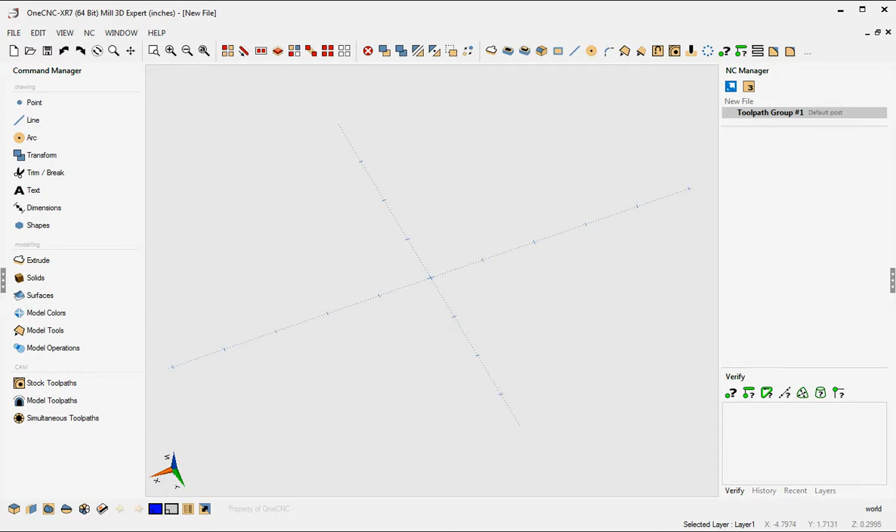This is something that again has been available all the way through since XR5, but because XR7 now allows you to collapse these toolbars, you can now work full screen if you'd like. All right, so that's the first thing I want to demonstrate in this video. And again, this full screen option is going to be available in all OneCNC systems.

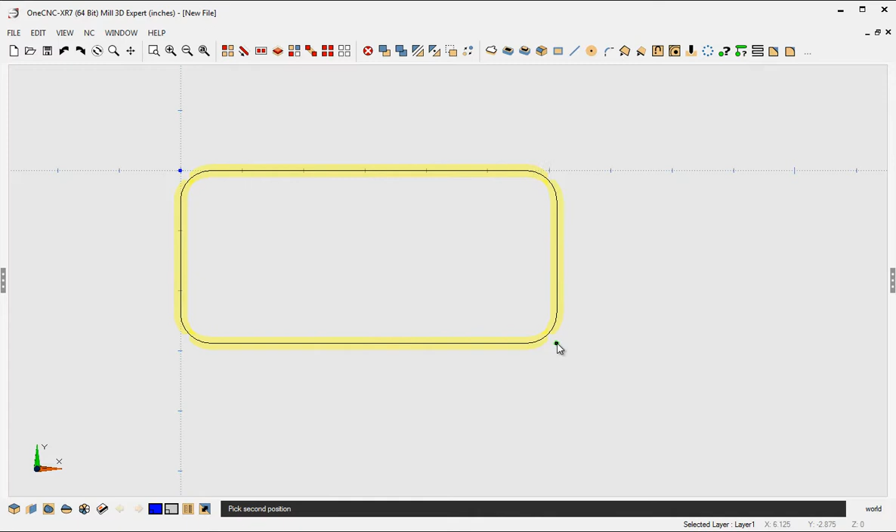So what's it like to work full screen using the quick access toolbar? Now I'm going to sketch a rectangle here. I'm just going to grid point snap to kind of speed things up here. Let's select the line command. Ultimately, I'm going to be making a solid model out of this. I'll say that looks fine.

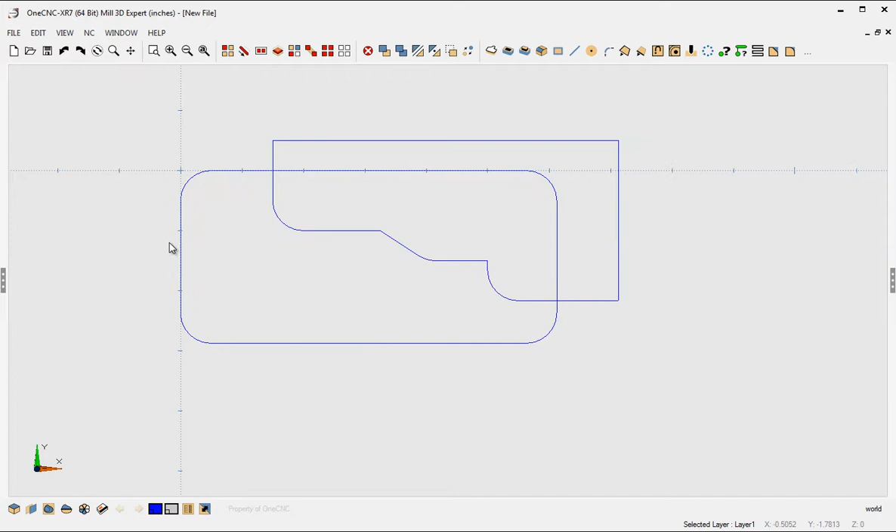Let's come up to here. That looks good. Let's add some fillets. Now, I'm moving through this really quick, and you can see I'm not putting any parameters in. If I wanted to, I could open this up here, and then when I go into something like fillet, I could access these parameters over here. Okay, so there's lots of versatility built in here. I'm just kind of giving you an idea of what can be done.

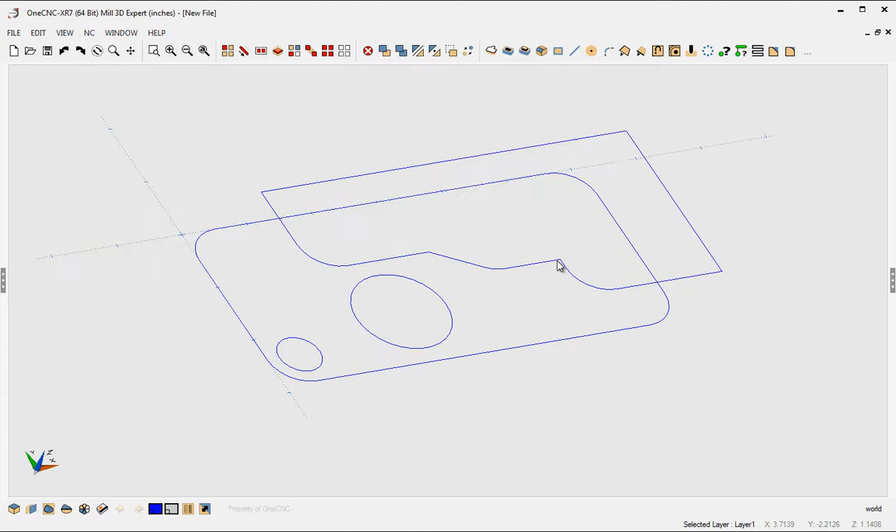Let's create a circle here. Let's quickly go to a top view. How about another circle here, but let's change the diameter and maybe change the location of that. Maybe put it right about there. Okay, so again, all I'm doing here is I'm just demonstrating working full screen. Now you might think of full screen mode as not being that big a deal, but once you see what it's like to use the entire screen for CAD and CAM, I think you'll immediately see the advantages to it. It's certainly something that I think is very nice.

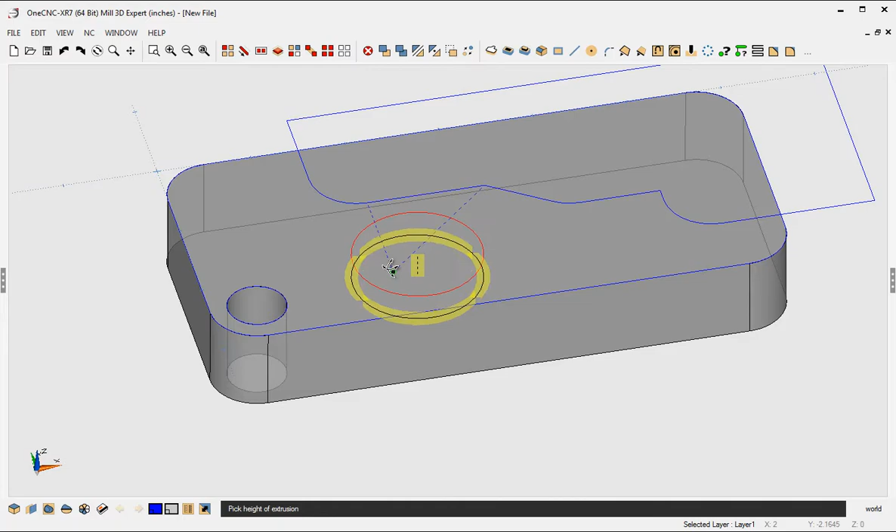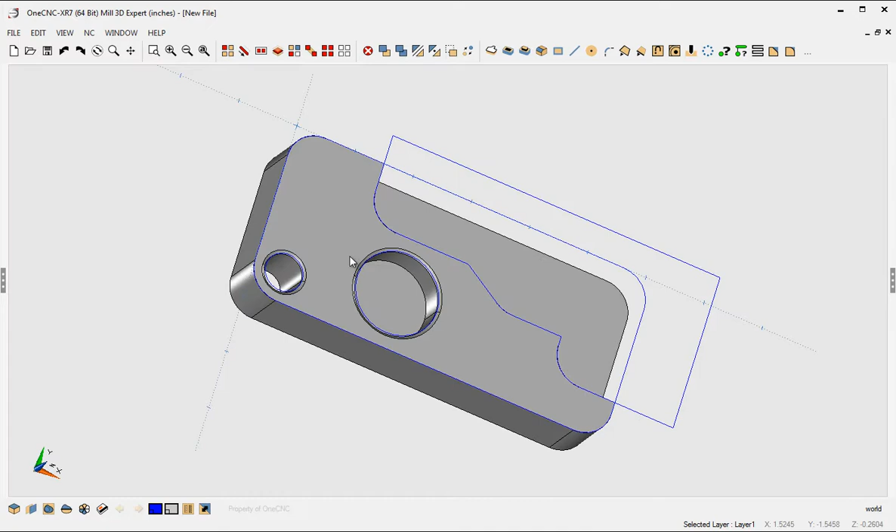So let's go into cut, and I'm going to just cut right about there. And the reason why I'm doing this is I want to demonstrate another new XR7 feature within this video. Let's just drag it right about there. And let's finish this by creating a couple of chamfers. 50 thousandths is fine. So I'll put a chamfer on each one of those. All right, so the actual procedures that I'm doing here, the actual commands, these are things that have been available since XR5, but the ability to work full screen and work right off your quick access toolbar solely is something brand new to OneCNC XR7.

Okay, so now that we have this, let's take a look at another feature. This is something else that's going to be available with all 1CNC systems. Express, Advantage, Professional, Expert, makes no matter what level of OneCNC you have or what discipline, whether it be lathe, mill, wire, profiler, or whatever, you'll still have this new feature as well, and it's called model colors. So what is model colors all about? Well, what this allows you to do is it allows you to color different faces on a solid model or different surfaces if you want to. And as I do this, I'm going to explain why this can be very beneficial.

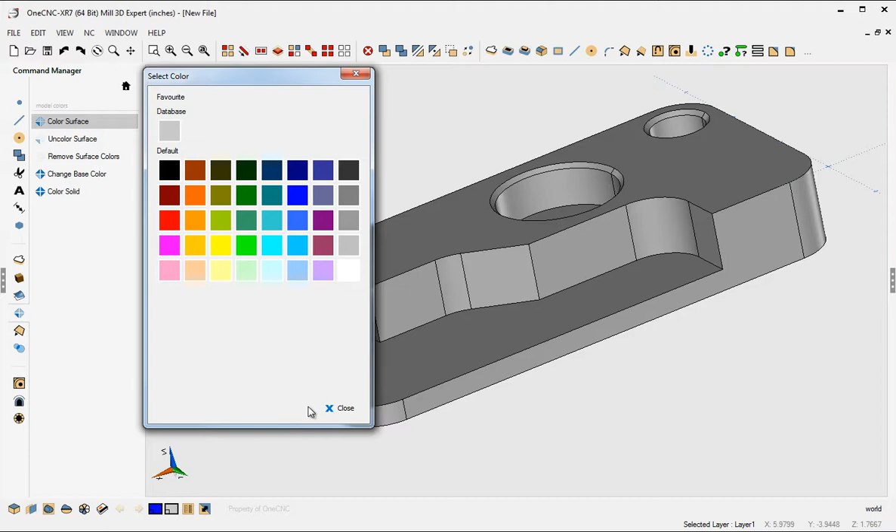Let's go to color surface, and when I click that, we get a color palette here. I'm going to start with this purple, and all you do is left-hand mouse click on the face that you want. Now, because this is a solid model, let's grab the bottom there as well. Because this is a solid model, we're just coloring the faces.

But what's interesting is it still remains one solid model. Now, the advantage to that is in the past, if we wanted to color surfaces, we'd have to go into our model operations and perform a break into surfaces. But this retains the fact that this is still a solid model.

So why would you want to color surfaces? What's the big deal about that? Well, it's more than just trying to make your solid model look more interesting. You can associate different colors to machining disciplines, tooling, or possibly fixture applications.

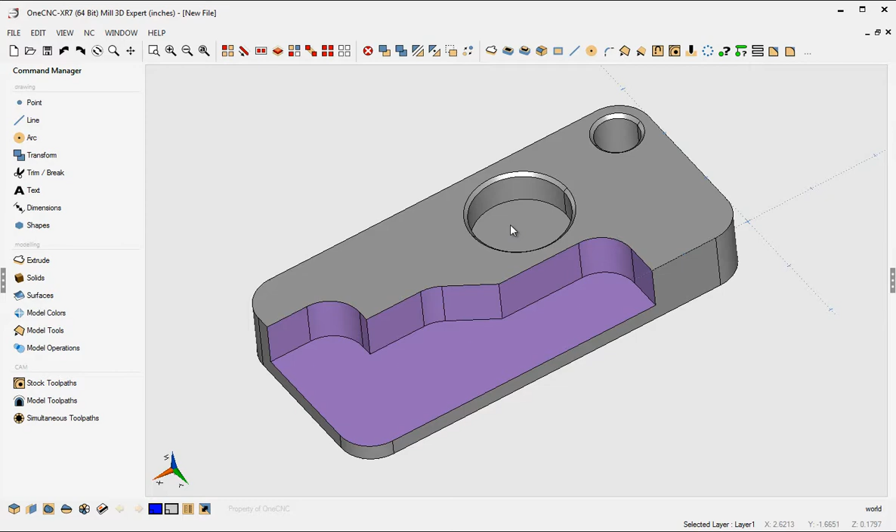So for example, at your shop, you might say every time we create a solid model and see that it's purple, we know we need to use a 4-flute 750 diameter end mill. Every time we see yellow faces, we know to use a half inch 3-flute. I'm just making those parameters up, but you see where I'm going with this. The ability to colorize your different faces and surfaces is more than just trying to make the solid model more interesting. There's definitely reasons for doing something like that.

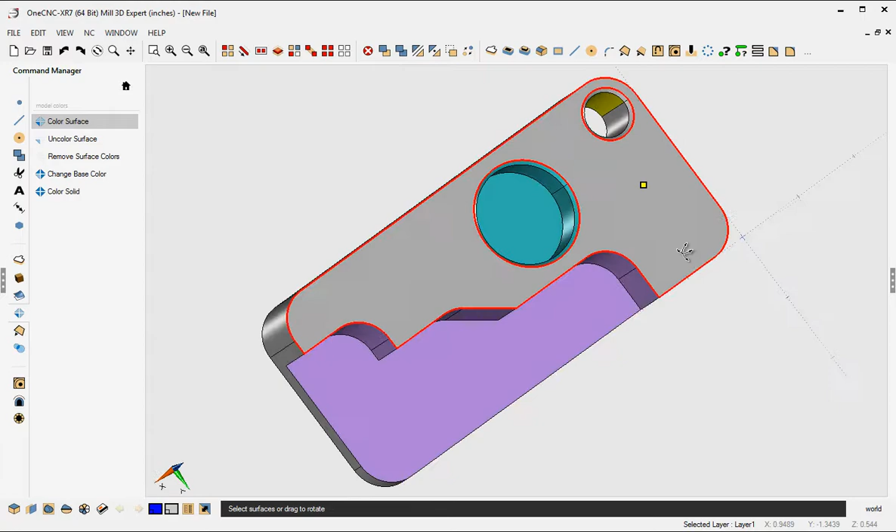In fact, in previous videos I've made, you've probably noticed I've had different colors on different surfaces, and I did that for machining. Just to remind me that all yellow holes are going to be drilled using a 3/8 diameter end mill, for example, or maybe all blue holes are going to be tapped with a 1/4-20. It's really up to you on why you do that. It's more than just being able to color the solid model.

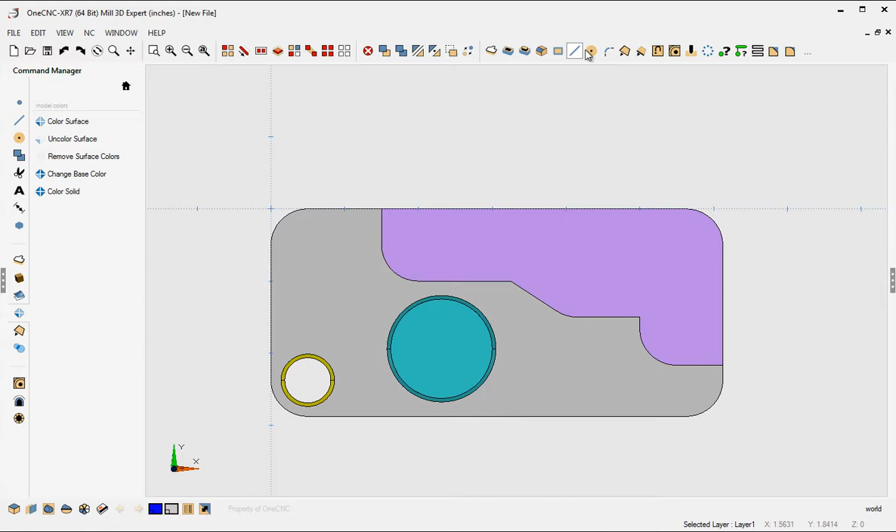So we talked about how we're just coloring faces here. Let me quickly demonstrate that. Let's just put a circle, and again I'm just grid point snapping. I'll put a circle there, and why don't we cut this? You can see inside here that the solid model is still the gray color, still the base color. So we're just coloring the faces there. All right, let's undo that.

Let's take a look at some other features available within the new XR7 model colors. There's one here called Uncolor Surface, and that does exactly as you would imagine. You just left click and it will uncolor whatever surface you click on. I'm going to undo that with a Control Z.

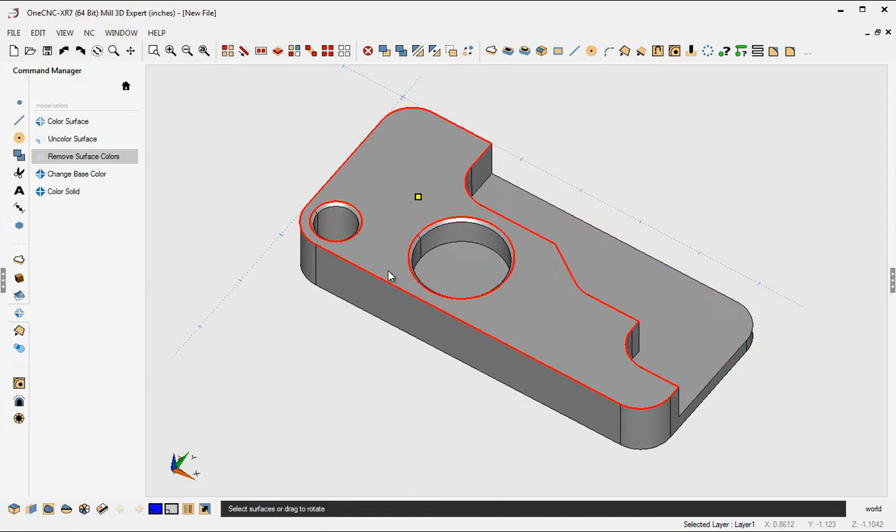There's Remove Surface Colors. That's going to remove the surface colors from the entire model. So we can left click and you can see all the colors have been removed. I'm going to undo that with a Control Z, which is just like hitting your undo button up there.

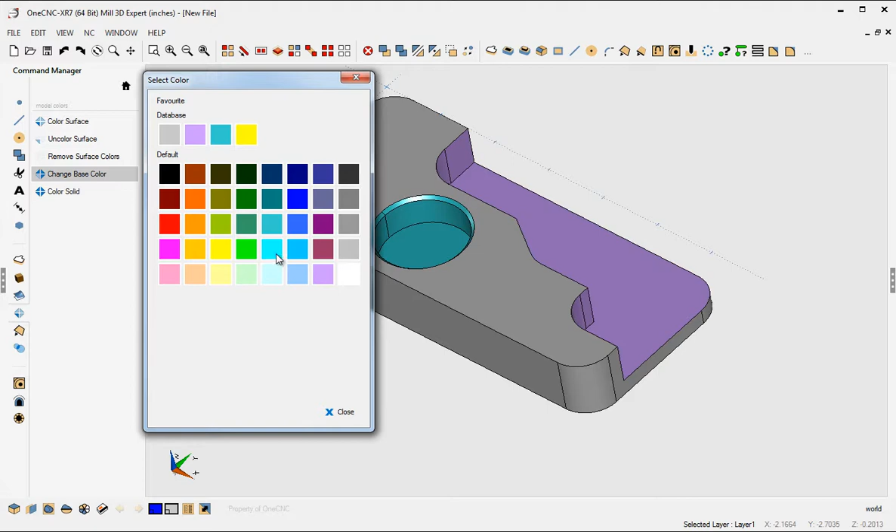Change base color. Now what this does is kind of interesting. See how I have purple faces here and a purple face on the bottom? Well, if we go to change base color, and I select something different, maybe this light blue here, if I select any one of these purple faces, all the purple faces will change to the new color. And so we can see that's been done there. So let's undo that.

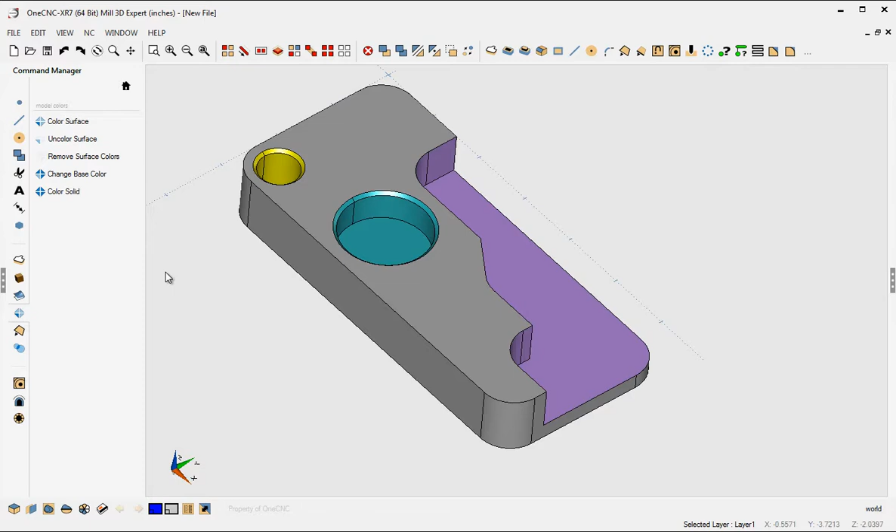And then this option here called solid color, or color solid, is going to remove all these face colors and just recolor the entire solid model. So if we were to click this color solid, and let's go with this blue here, left click, you can see now the entire solid model. In fact, if you come up here to select by color, you can see that it's just showing that one color.

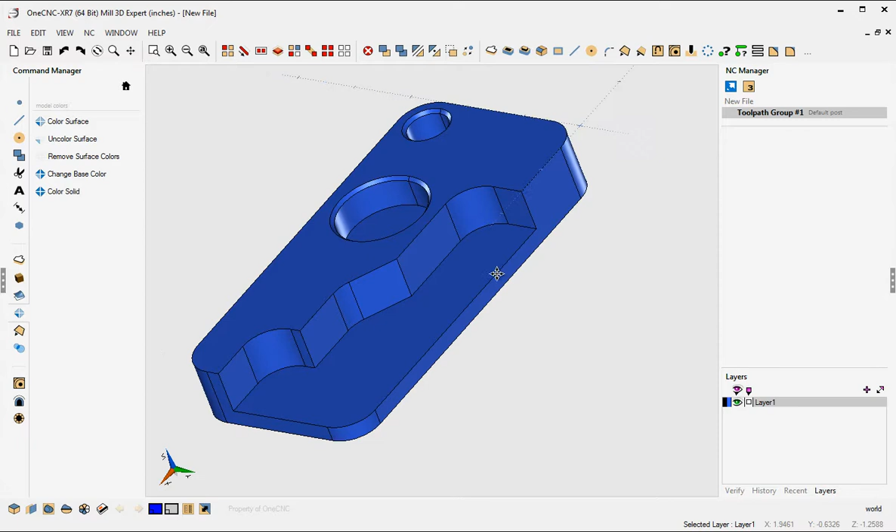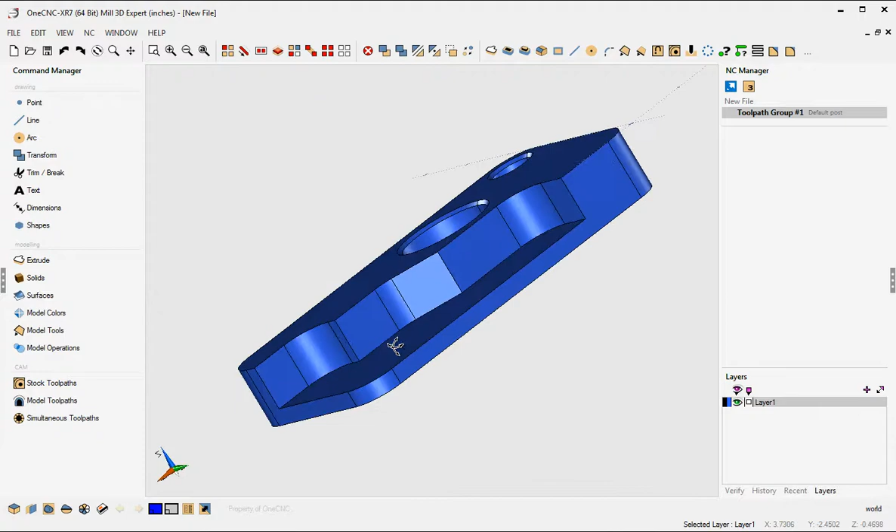Okay, so in this video, what we've talked about is the ability now to collapse these side toolbars, which gives you the added benefit of working in full screen mode. We also talked about how the quick access toolbar can now be used if you want to work completely in full screen mode. And we took a look at the new model colors features within XR7, which allow you to color faces or individual surfaces a different color. Again, that's not just to make your solid model or surface look more interesting. You can associate things like tooling information, machining disciplines, and even fixture applications just based upon color.

You can set your own standards up at your shop and use that. Everything I've demonstrated in this video, this XR7 video, will be available in all OneCNC XR7 systems.

Okay, and just one more thing really quick before I go. I was able to create a solid model because I'm using OneCNC Mill Expert. If I have Mill Professional, I can also create a solid model. If I have Advantage or Express, I won't be able to create a solid model, but if I import a solid model into Express or Advantage, I can still use the model color features to change the color of faces and surfaces. And of course, you'll still have the ability to collapse the side toolbars.